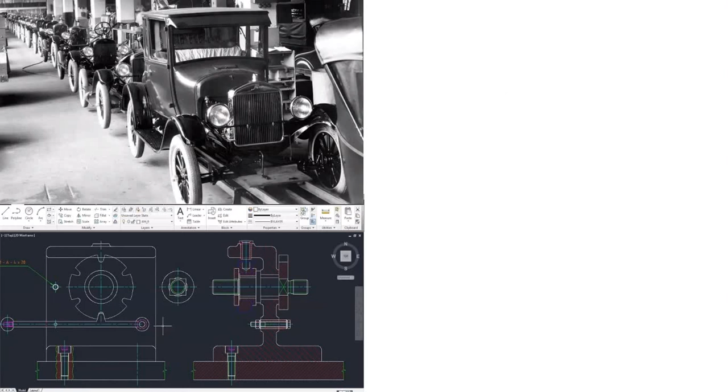So first, again, we'd like to cover a quick introduction to generative technology. So as many of you might be aware of, Autodesk has been making CAD solutions for a little over 35 years at this point. And CAD has always been a way for an engineer to take the ideas that they have and really to put them down on paper. So we've always been constrained on the production processes that we're actually producing our parts with, and we're constrained with the ideas that we can have as humans, really.

So as we look towards the future and we look at the growth of additive manufacturing, Autodesk realized that we need a new set of solutions that allow us to actually explore all of these brand new opportunities that we have. So the idea with generative technology is that it's actually a co-creator within the process. So rather than you creating the part itself, you're creating the loading conditions, you're creating the geometries you need, and you're allowing the generative technology to then explore ranges of options and manufacturing types that you probably wouldn't have thought of yourself.

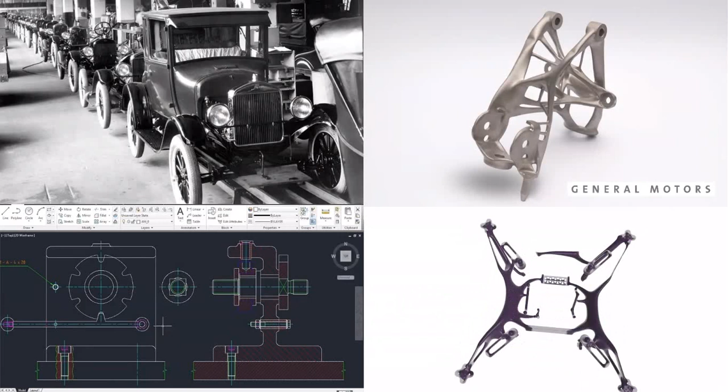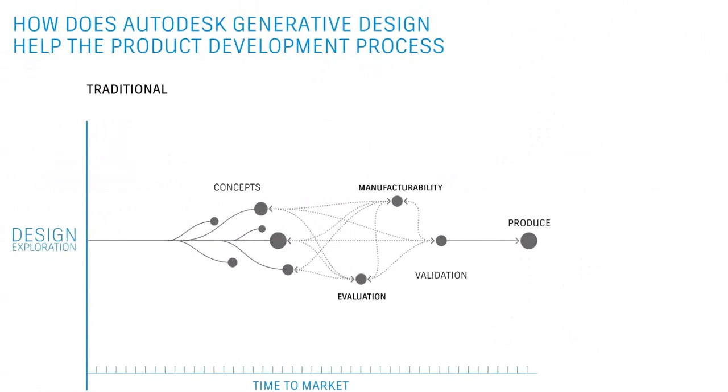So the traditional product cycle that we're really trying to adjust, you're seeing on here. Many of our customers would take a small handful of concepts, it could be 3 or 4, and they start evaluating those for manufacturability, for the integrity of that part. And in the end, they're bringing a product to market that may have taken them longer since they didn't have a lot of concepts. And it might be compromised for some of those manufacturing processes. Maybe they weren't exploring all of the options.

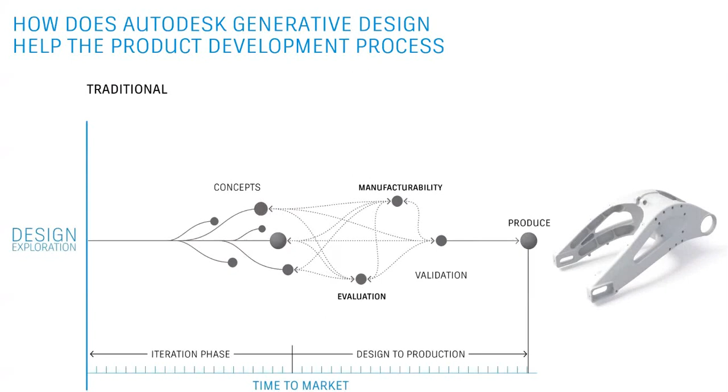So what we'd really like to produce on the generative technology side is, rather than a small handful of concepts, generate hundreds or thousands of options very early on within a product cycle. So teams of engineers can explore options that they would have never thought of in the past, creating outcomes like you see on the right that typically in the past we would have never thought of.

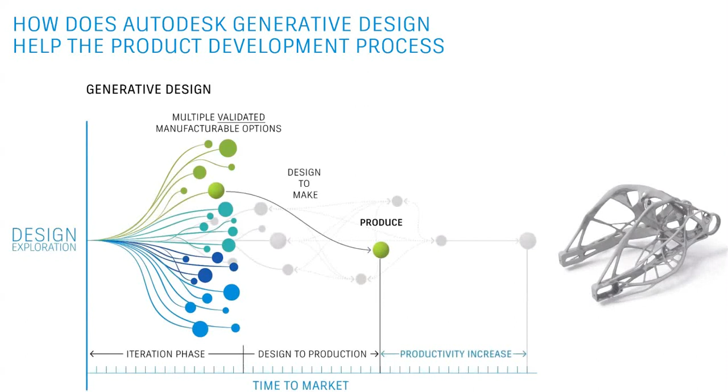So when you look at actually applying generative technology, there's a couple main advantages, and we talked about this a little bit over the last 2 slides. It's really about exploring a wider range of options. So we've always been constrained, typically through the manufacturing process, on what our products need to be. Now we can explore anything from additive manufacturing to 3 and 5 axis subtractive and a range of materials, so we can then start making trade-offs as opposed to continuously making the same type of product.

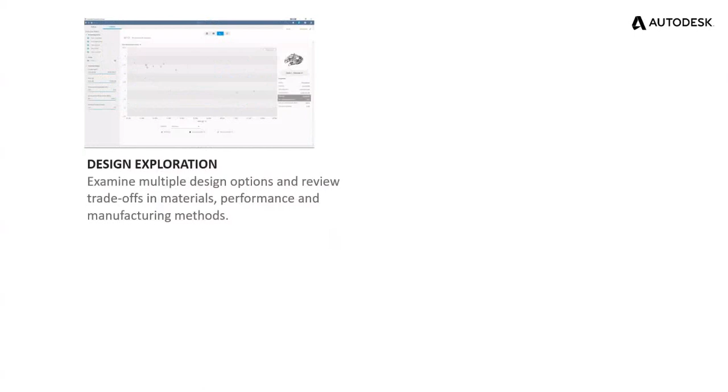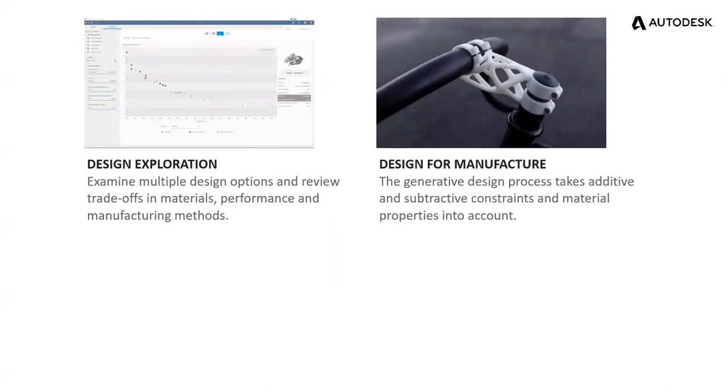Second to that would be planning for the additive manufacturing process. So we talked again about how the means of production are really changing. So generative allows us to truly get the most out of the additive manufacturing process and, again, create a product that we wouldn't have thought of. And third to that would be a parts consolidation example. So generative also allows us to take what was typically multiple components within an assembly and generate an option to consolidate those into one single component.

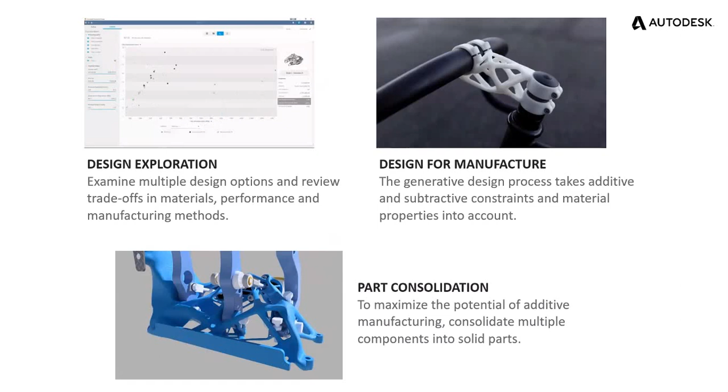So just to show a couple use cases, many people might be familiar with the General Motors generative example, and this kind of highlights everything that we were just talking about on that last slide. So General Motors took that very conventionally produced seat bracket assembly to the top left, and they started generating options of what other kind of ideas they could explore. So in the end, they ended up generating a product that was 40% lighter than the original, 20% stronger. It also consolidated that assembly from 8 components to 1, so saving them on their supply chain.

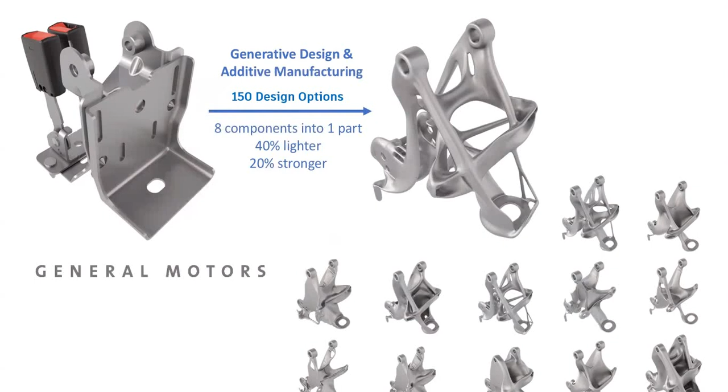But probably more important than all of those things, they were able to generate 150 viable options that they could then start making trade-offs for. So trade-offs for the manufacturing process and trade-offs for the kind of materials that they could produce this with as well.

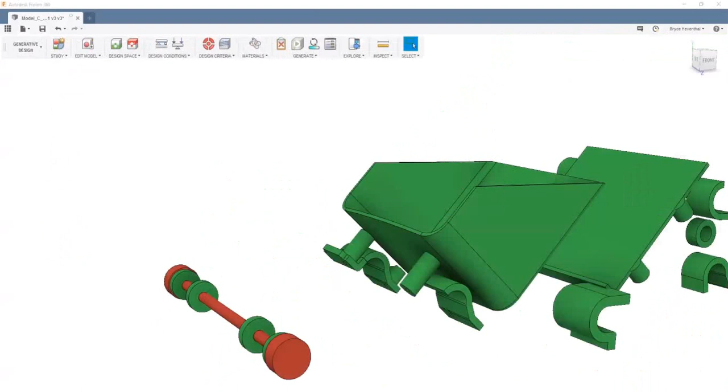So to show the workflow for generative technology, this is a company called Wheel. And what they took is this seat bracket assembly and a very similar process. They first looked at what they needed to connect to and then what they needed to avoid. They set up their loading conditions. So again, this is walking through the entire process from left to right that you can see on the screen. They set their manufacturing processes, so exploring additive manufacturing, subtractive manufacturing. And then they could start solving and exploring options that, again, would be very unique to what they produced in the past.

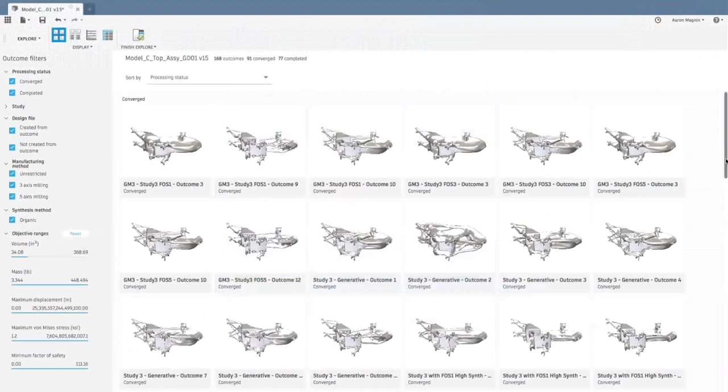So that last image was a preview prior to solving. And then after they've run through and solved everything, they can get hundreds of options pretty quickly. And they can start making trade-offs for, again, the material type and then the manufacturing process as well.

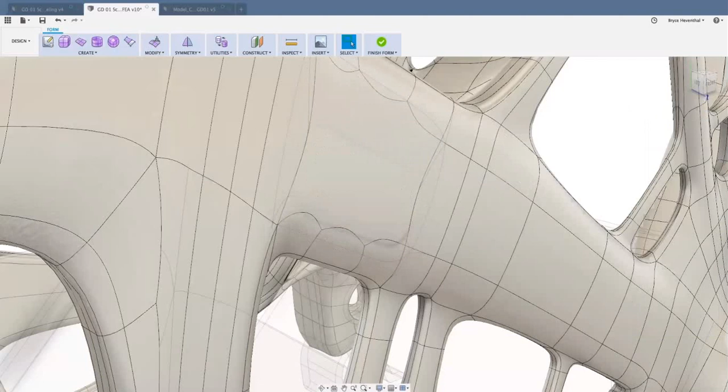So one of the most important things with this process is that after you've generated a component, we are outputting solid usable CAD geometry that you can bring right back into your assembly. You can post-process like you're seeing on the screen. You can run a secondary FEA analysis if you need to, or connect it with additive and subtractive. So really the magic of this entire process is that we're not just creating a mesh that you would have to model over. It's truly creating usable solid CAD geometry.

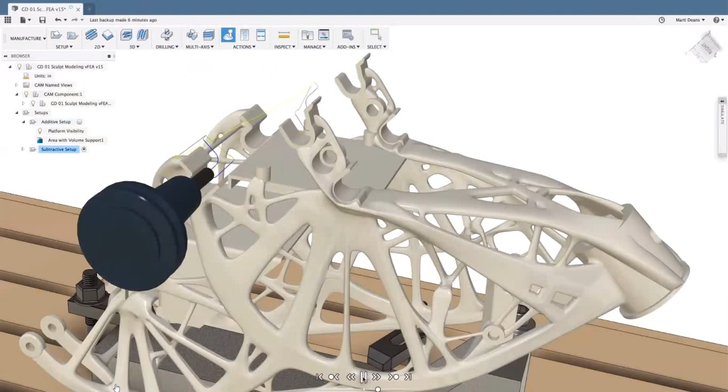So here at the end of the video, you can see some of the CAM toolpaths created and then that final component placed on that assembly.

So there's three main ways to find advantages using the generative technology process. Again, that idea, the first one would be exploring a range of options. So making trade-offs for materials, performance, and manufacturing types. Second would be through the parts consolidation ideas, similar to what we saw with GM. So taking 8 parts and consolidating that down to 1.

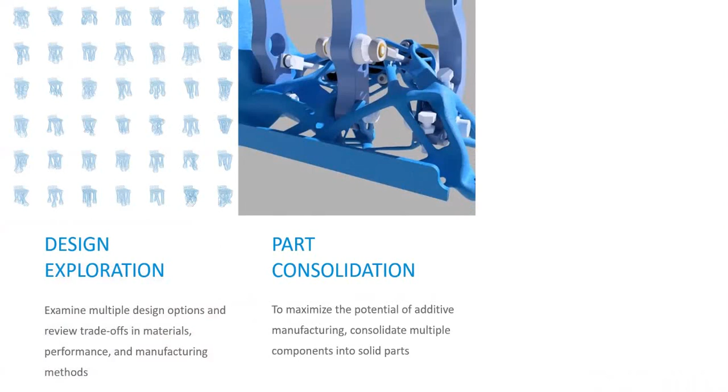And then the third is part enhancement. And this is where we'll actually focus today. So the reason that we chose the use case that we'll be presenting later on is that we think it's pretty unique and it's something that not a lot of people have explored yet. So this is an example where we have an existing component and we're going to use generative technology to improve strength and then reduce the mass of that component as well.

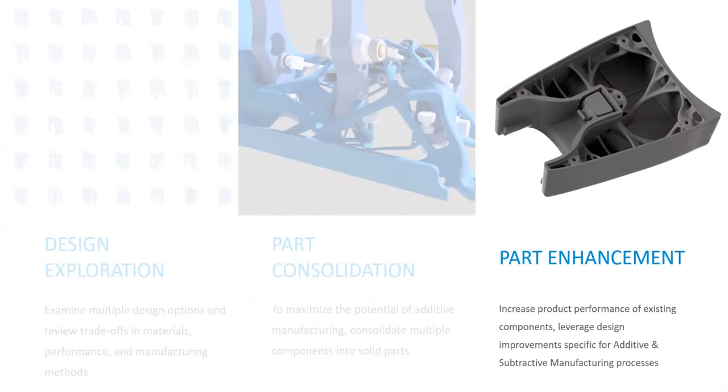So just to conclude a little bit about the introduction to generative technology. So what is unique about it? Again, the idea that we're exploring a range of options. So within one solve, we could get tens, hundreds, or thousands of options. We're exploring a range of materials and manufacturing types. And then what we get on the back end is CAD-ready geometry that we can continue to work with.

So with that, I'd like to kick it over to the team from Penumbra, and we can start covering the use case we'll be talking about today. Oh, thanks so much, Matt. This is Dean Pierce again with Penumbra Engineering. I'm going to give you a little background as to who we are and kind of where we've come from.

As both of us mentioned in the beginning, we come from the aerospace industry mostly, but in there we've got backgrounds in both design and test. One of the things that we're very proud of is being part of the Arizona Tech Council here and the Additive Manufacturing Committee here in Arizona. My co-owner Steven is a co-chair for that, and we've been trying to become as active as possible with regard to generative design amongst the community, and it's being received, and people are starting to dig deeper into it, including some of the larger corporations as well, which is very good. Everything is moving forward with that.

We have a licensed professional engineer, that's me, and we've spoken at a number of different events, like the Additive Manufacturing Tech Council meetings down in Southern Arizona, the Business Expo, 10 West. All those things have been predominantly here in Southern Arizona, specifically in Tucson. And I was going to mention too that we actually did basically this topic at Autodesk University back in November.

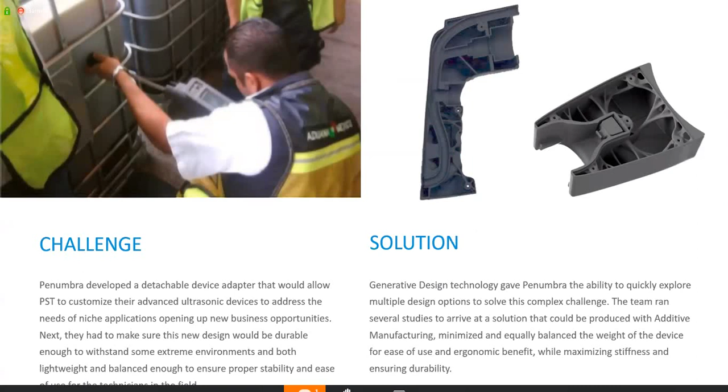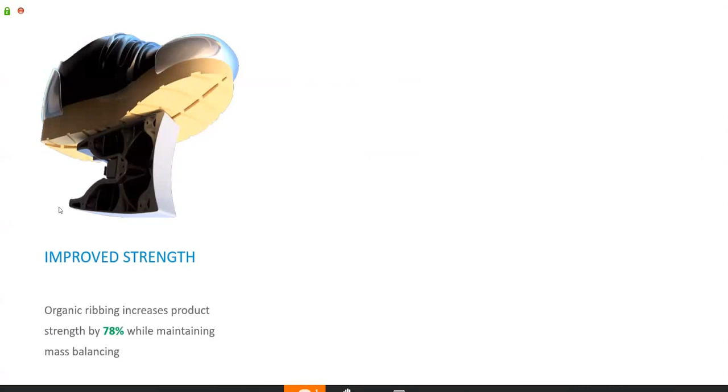And so one of the big things that generative design allows you to do along with additive manufacturing is really tackle that improved strength. One of the baselines that we were able to do is start out with a traditional type plastic design where we had traditional ribbing, and then we were able to go over to generative design and create a bunch of new options. And then we were able to arrive at a result that was a 78% increase in strength while also maintaining mass balancing.

This product is a handheld, so a big portion of it is being able to have it so that it doesn't fatigue someone's wrist. So we're actually working with mass balancing. The good part about generative design is that you can actually put mass targets, or you can go for the lowest weight, the best strength to weight ratio possible. So we did a compromise there with the mass balancing to make a really, really good product that the technician out in the field could hold and not be fatigued.

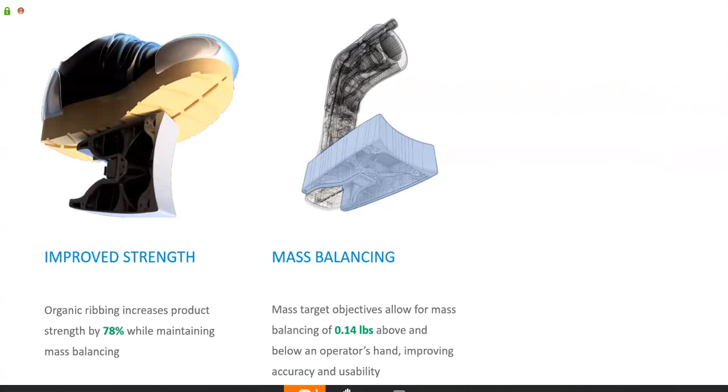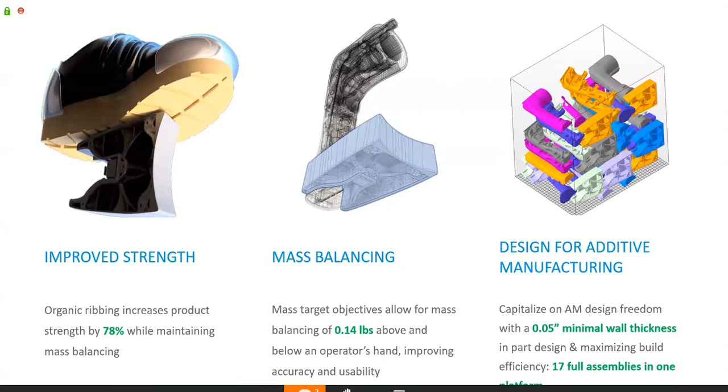And then lastly, the design for additive manufacturing portion. Generative design can be applied to a lot of different areas, but with additive manufacturing, we have that design freedom to really create this unique product from the ground up. And we're using parameters through, and Matt will talk about this a little bit, the other product that Autodesk has, Netfabb. We're able to go in and optimize it for builds to get the best cost per unit. Go to the next slide.

And yeah, taking a few steps back. So that's the use case, and we were able to deliver that product for them. But really the inspiration, where we first heard about generative design and this thinking and being able to apply this to projects from the ground up, started back in 2013. This is a book that I like to refer people to. It's called Fabricated.

And really this book really showed that the multi-jet fusion technology, which we'll talk about a little bit more as we go through, is a powder-based technology, but it's really based off of voxels. And so that concept where you can actually apply different material properties along a composition of a part. And so HP, MJF, and HP in general, their path is following this line of where we're going to be able to use generative design, create shapes that are optimized, complex shapes, but in the future, we'll also be able to take that a step further.

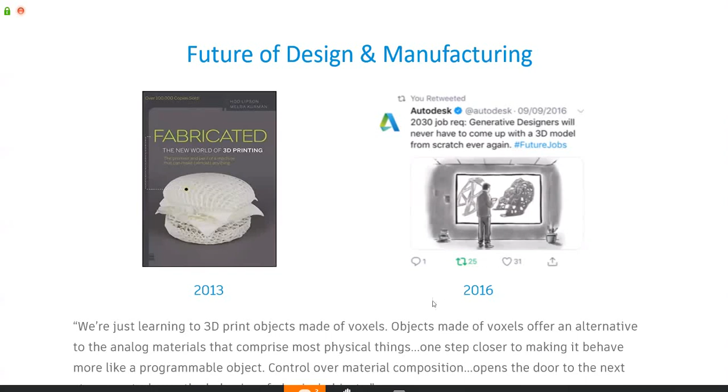And then, as you see there too, in 2016, generative design was taken out of Project Dreamcatcher, and you may have heard that if you follow Autodesk. And basically, generative design is the formation of that into an actual product that Autodesk is now using. And so the combination of this voxel type additive manufacturing technology plus generative design really combined together gives you this huge advantage when creating these new innovative products.

And then the next advantage is this optimized design is easy to use too. Like I mentioned, the mass balancing. So it's balance designed to reduce the fatigue on the user. And the good part is too, that this product was not intended to be produced in high volume. It was a low volume product. So you're talking 1,000 units or less per year. And with multi-jet fusion technology, the cost per part makes this a viable option.

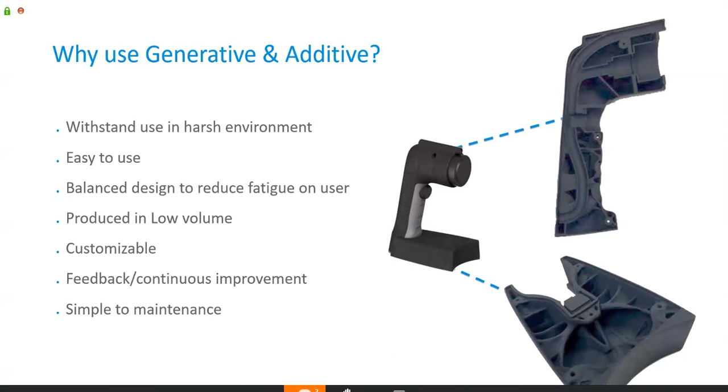And then another big benefit too is we try to make this really simple to maintain. So combining a lot of parts together where we could, try not to use a lot of hardware, so that if we needed to maintain this, take it apart, replace some of the electronics inside, we could. So I'll pass it back to Matt now.

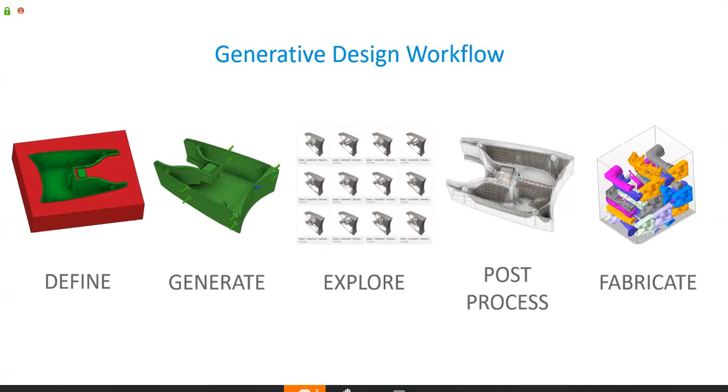Next, we need to post-process. So we talked about this a little bit at the beginning, is that the outcome that you get from generative design is usable CAD. So we need to take that usable CAD geometry right back into something like Fusion, and there we can post-process or make any final adjustments. And then finally, we need to fabricate. So in this case, we connected it with our additive manufacturing platform to then produce the components that you'll see moving forward.

So to get started on this workflow, looking a little bit closer. So again, we talked about the first step that you always need to do on these projects is to take all of your geometry into account. You need to think about your functional and your manufacturing requirements. And you actually need to edit or create geometry to call out those obstacle geometries that we talked about.

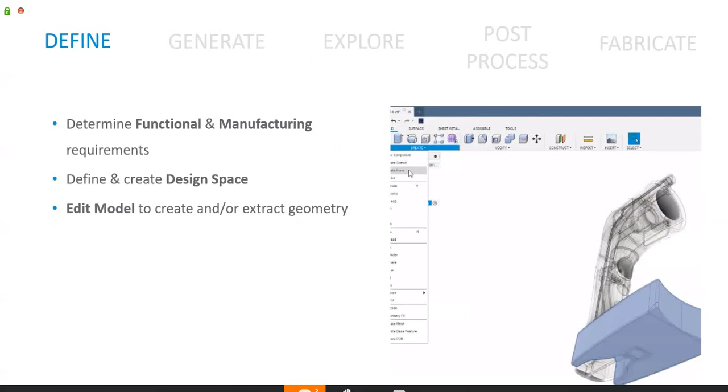So to do that, we took the existing component, and what we needed to do was start to extract some of that geometry where we wanted generative to come into play. So here we took that conventionally produced part that had those pinned sections that you can see from that lower face, and we've essentially cut those away because we want a brand new way for generative to create all of those connecting features.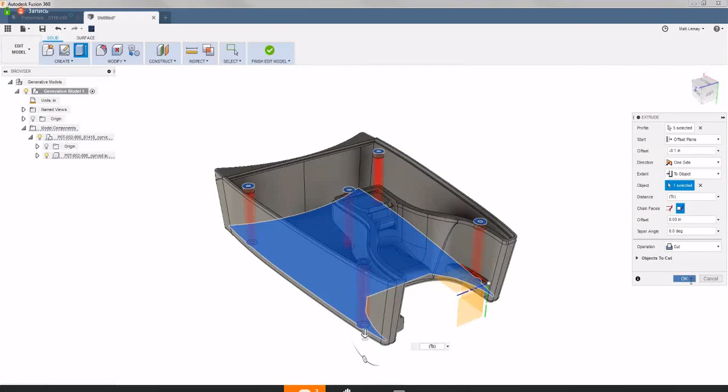We then needed to create material on the outside of this component, which we would call out as an obstacle geometry later, saying that we want the exterior of our component to look exactly the same as it currently would with a traditional process.

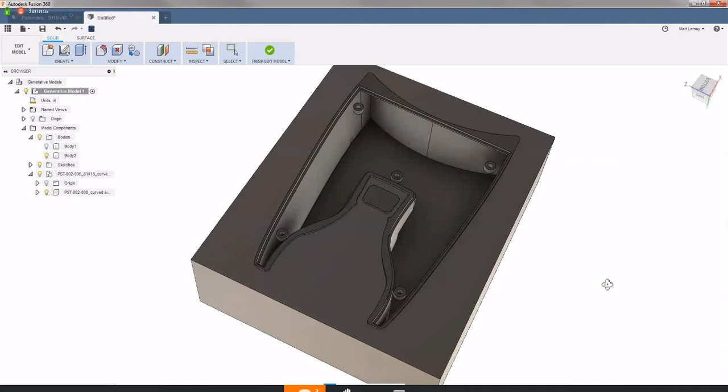And then moving forward, sorry about that, lost the slide. We need to then set up the generative solve itself. So again, we need to go through, call out what our preserves are. Our preserves, again, are the geometry that we know that we need to keep in. We need to call out our obstacle geometries, which again is the geometry locations that we need to avoid.

We need to set our performance objectives, whether it's minimizing mass or setting a specific mass target, like we talked about for this project. We need to select our manufacturing types. So we've been talking a lot about additive manufacturing within this presentation. However, it's also very important to know that we can also set up subtractive manufacturing constraints as well. So we could put in 3 and 5 axis requirements. And then we need to set our material, the materials that we'd like to solve with as well.

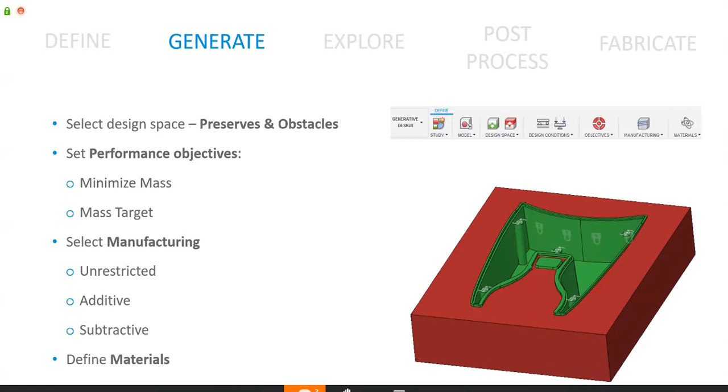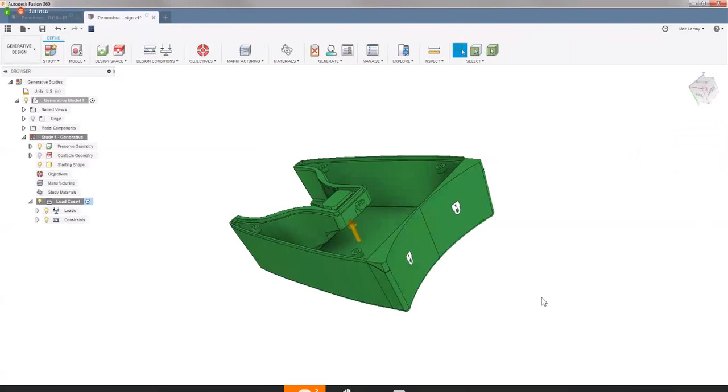So just to show this quick flow that we were just talking about, all of that geometry that we've created, we're now calling out as the obstacle geometry, and that turned to red, meaning after the generative process is completed, there's not going to be any geometry that goes in those sections. We're then calling out what our preserved geometries are, and you can see that in green. So that's all of the geometry that we know that we need at the end of this solve.

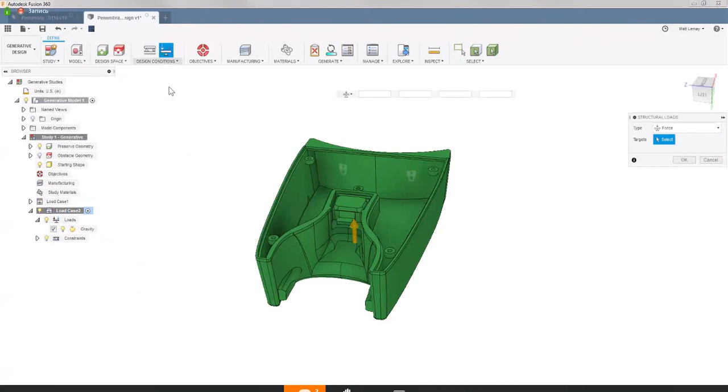And then we start applying our loads and constraints. So we know when the adapter is attached to the handle, it's constrained on those faces that you see in the lock in the back, and then there's a pressure force applied to those front faces. So we would continue applying load cases, and then in the end, we had about, I think, 7 or 8 separate load cases that could correctly identify all of the structural needs that this part would have. So I'll fast forward this just a little bit. So we've applied, now you can see to the tree on the left, all 6 of our load cases.

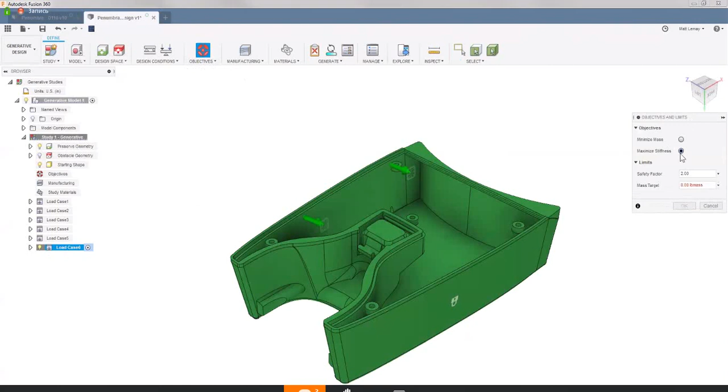And moving forward, if you see the user interface at the top, everything is moving left to right. So after we've applied those load cases, the next thing that we would do is set our objectives for the solve. So here we talked about the ability to set a mass target, which is really interesting in this case. So we can say, generate me components that have a specific mass. In this case, we did 0.14 pounds. So that's allowing us the ability to then even out the mass on the top of the adapter and on the bottom, making it a really easy to use part for the technician.

Next would be setting our manufacturing constraints. So here we know with the HP Multi Jet Fusion process, there's a minimum thickness requirement that needs to be met. And then you can see underneath, there's also milling constraints that we might apply just to see what kind of results we can get through that. So again, within one solve, we can set all of these manufacturing criteria, and we can also set a range of materials to explore as well.

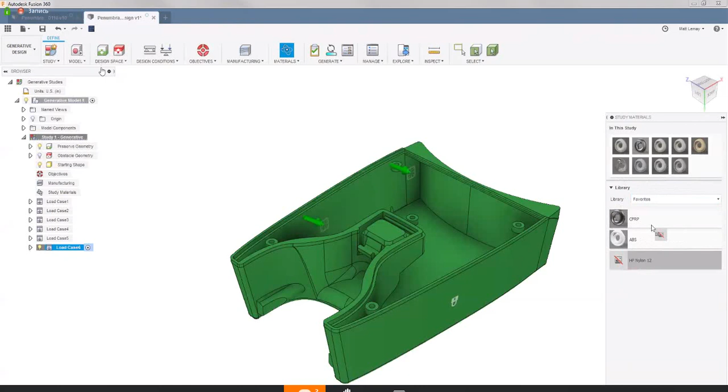So in the end, we ended up going with HP nylon 12, but we can explore a lot more than that as well. We can say, show me the results if it was in a carbon fiber reinforced plastic, nylon 6, HP nylon 12. We can put in all of these different material options so we can explore what the performance improvements for each one might be at the end. So again, in the same way that we selected a range of manufacturing types, we can also select a range of materials to then explore. And when we're finished with that, so we selected up to 10, at that point, we would be ready to start solving.

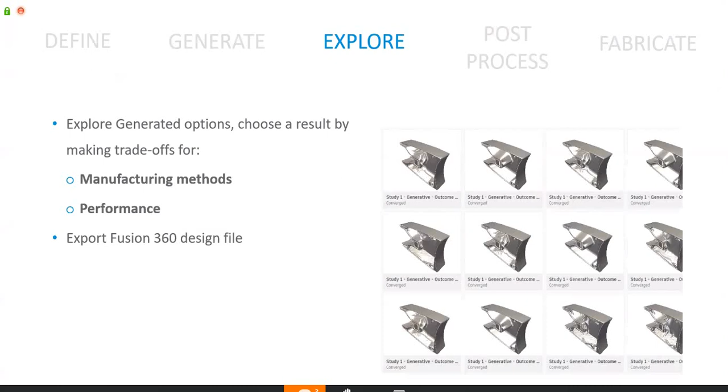So the next phase, after we've set up our project, we've applied our loading conditions, set our objectives and our manufacturing types and materials, the next phase would be to explore the results we've actually created. So here we can start making those trade-offs we've been talking about, and then we'll send out that solid CAD file to work with. So through this project, there's a wide range of options. Again, we had a range of materials, a range of manufacturing types. So each one of those materials and manufacturing types yields its own unique solution. So carbon fiber reinforced plastic is going to react very uniquely to how HP nylon 12 and additive manufacturing might.

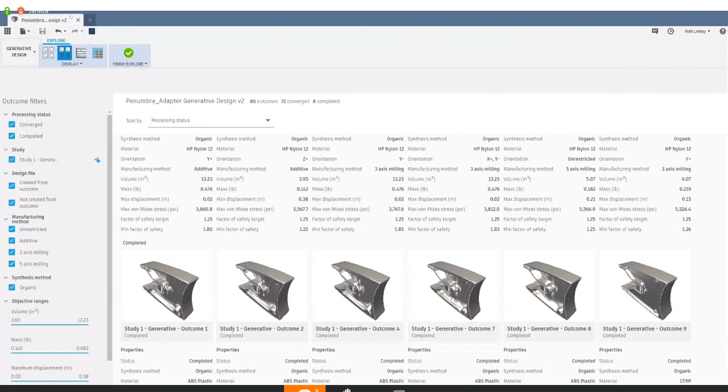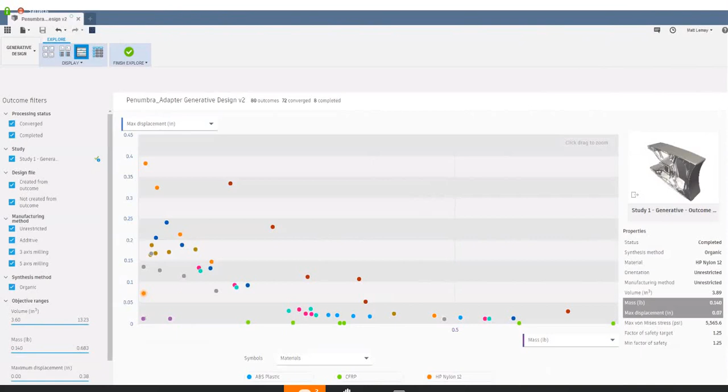So here we can take all of those results. We can view them in the thumbnails and the properties that you see. We can also view them graphically as well. So this is really interesting where we can say, show me all of these parts on a specific mass range. We can start filtering them down to specific strengths and stress references that we would like to then find the part that we'd like to move forward with.

So the part that we found is the one that you can see on the screen there. So this was, again, that HP nylon 12. This was meant to be an additive solution, so it kept that minimum thickness that we required for this project. And it also met the mass target of the 0.14 pounds that we wanted to find for the adapter.

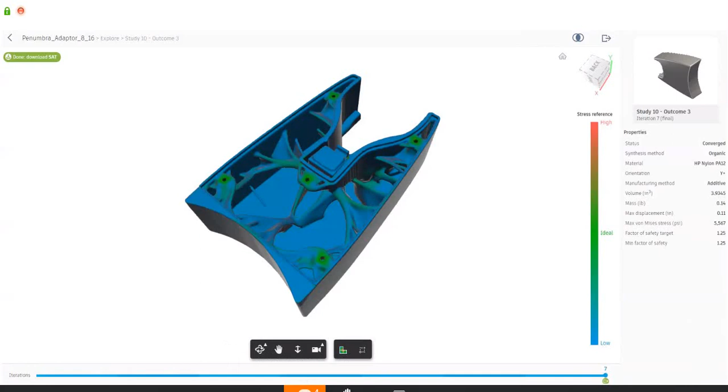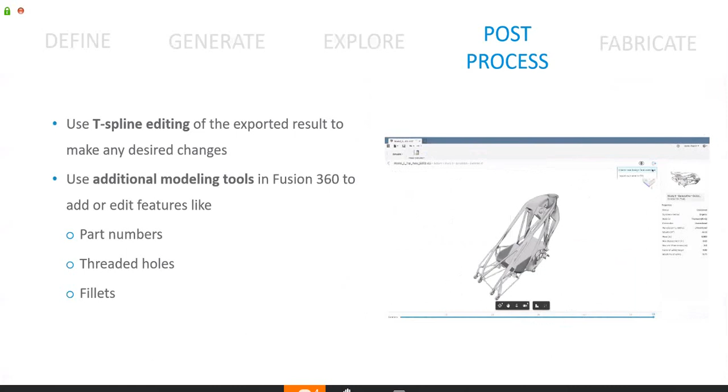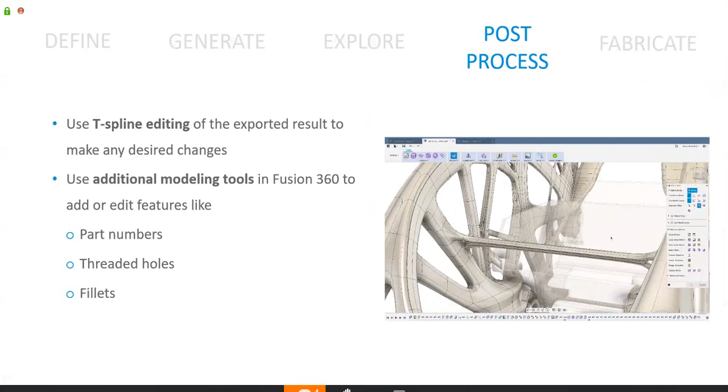So moving forward, and we won't show too much on this project with it, but after we've sent out that solid CAD file to then move forward with, we have the ability to post-process that. So this could be adjusting the actual surface geometry itself. It could be adding a part number to it, or whatever we need to do to get it fully ready for the production process. Again, the real value here is that the generated part that we've created is usable CAD that we can send back.

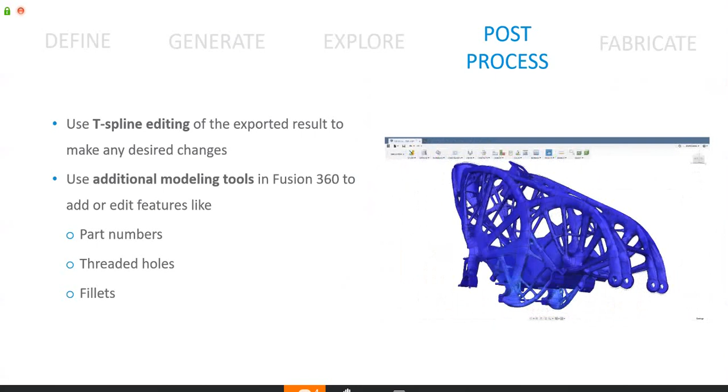And then finally, the last phase, which is fabricate. So after we've generated a component, we've sent it back, we've post-processed, we're ready to connect this with the additive manufacturing process, and we'll show that with Netfabb, which is Autodesk's additive manufacturing platform.

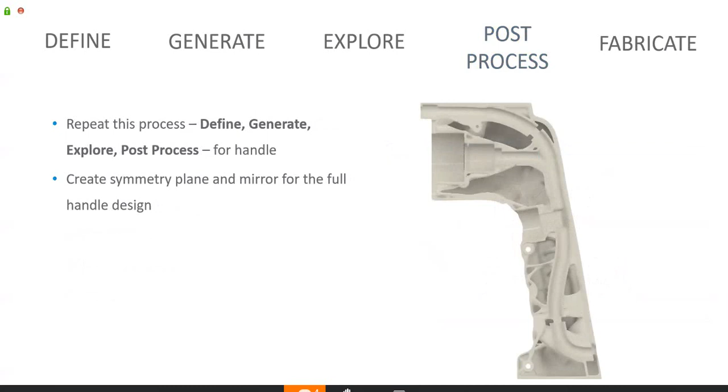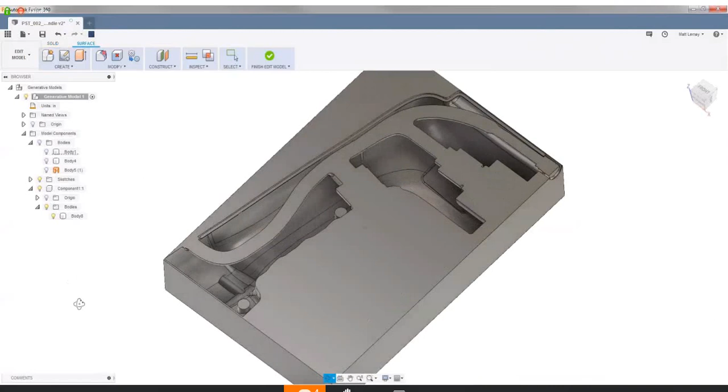Oh, I guess we do actually have the handle as well. So we showed the adapter, but it's going to be a very similar process for the rest of that component, where we're setting up our geometry space, creating geometry to call out as obstacles where we know we can't generate any, applying our loading conditions, setting our manufacturing and material types, and then solving as well. So the same way that we did that process here for the handle component as well.

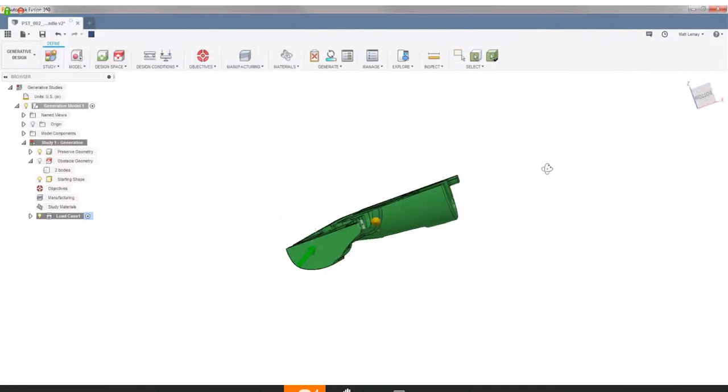So I'll fast forward a little bit in this video. You can see we have the generative user interface again. The green is the preserved geometry for the outside of the handle. And again, we're applying our loads and constraints to this part.

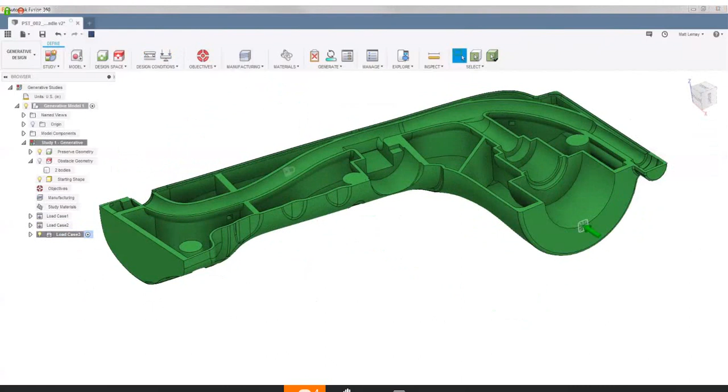So with the adapter, we had about 7 or 8 load cases, and we would do the same for the handle. So after we apply all the load cases, again, we talked about the ability to set a specific mass target for the adapter, which would be lower than the operator's hand, to even that out to the top. So in this case, we can put a mass target that's going to allow us to say that on top of the hand is going to weigh the same as on the bottom of the hand as well.

Same thing with the manufacturing types, like we did with the adapter. We can put in our additive manufacturing requirements, and we can also explore those subtractive options as well. And then exactly the same, we always want to explore as many material options as possible. So we could select up to 10 the same way that we did with the adapter.

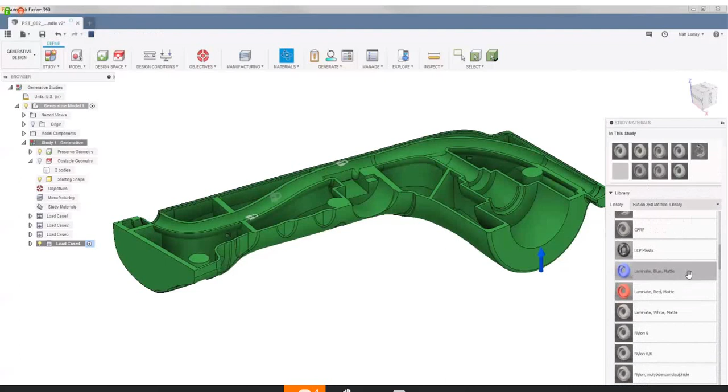And then finally, after we've set up that project, we can then solve it and then start to explore all those options. You can see I've ran this one a couple different times. So there's a wide range of results that we received from that, over 140 outcomes. And it's important to note as well that within each one of the outcomes, there's also a range of iterations that we can choose from.

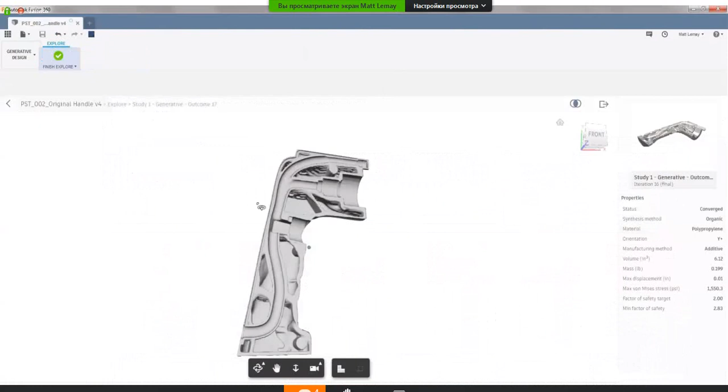So if you see that slider at the bottom of that one outcome, and I'll pause it right here. You can see that this one ran 30 iterations. All of the iterations leading up to this final converged solution are also viable, usable options that we could move forward with as well.

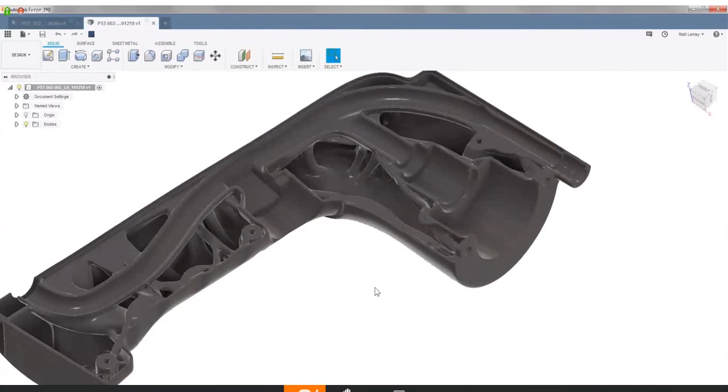So after we've found the iteration and the outcome that we'd like to move forward with, again, we can send that out as usable CAD geometry that we could then continue to adjust or run through FEA, or we can continue to produce. So after we've set up the adapter, generated our outcome, and we've generated our handle outcome as well, the next phase would be to fabricate. And this is through Autodesk Additive Manufacturing Platform.

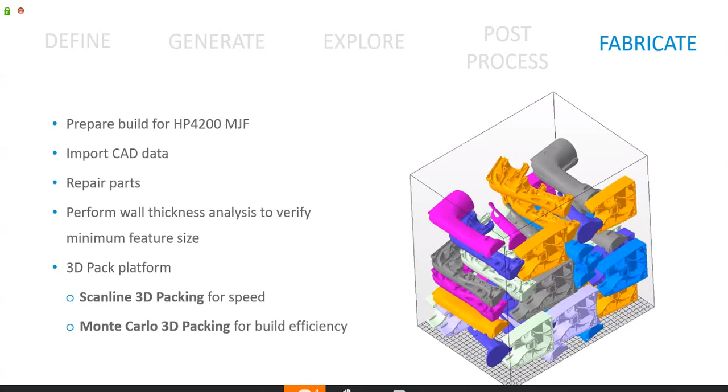So what we need to factor in here is we're looking at the HP Multi Jet Fusion process, which one of the great things about that process is that it allows for 3D packing. So if you're not familiar with that, you can fill almost the entire volume of an HP printer with components, allowing you to drastically improve the efficiency of your process. We can look, and then just verifying that minimum wall thickness was met.

So again, the first thing that we would do is we would bring those components inside the HP Multi Jet Fusion workspace. Within that workspace, we can take a look at each one of the components. And one of the first things you typically always do is you might repair a part. So in this case, there weren't any issues with the part. It came in as a watertight solid, as you would expect from sending it out through the process that we just showed.

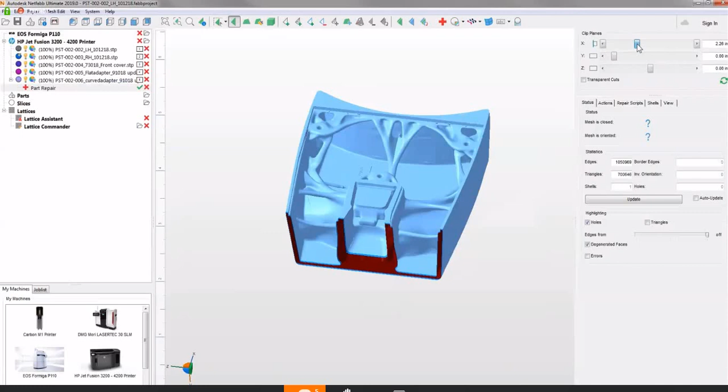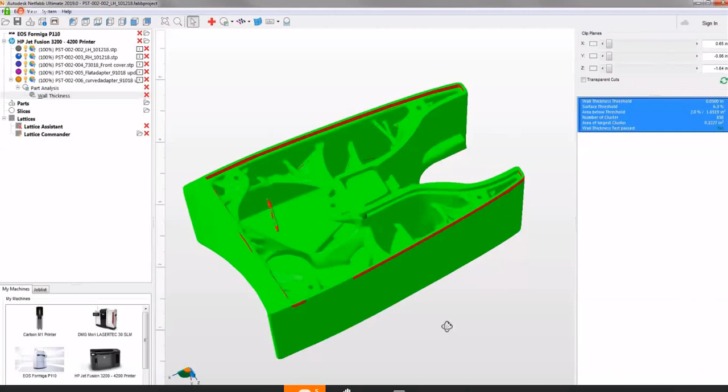We can also run a minimum wall thickness test to make sure that all of the features within this component would fit the minimum wall thickness that the HP process allows for. And you can see that this is above the threshold in saying that this passed. Again, we set that minimum wall thickness when we were setting up our project as well.

So the next phase, and again, this goes back to the idea that we can fill an entire printer's platform. We really want to try to get the most out of this process. So there's a couple different ways to do it. We can 3D pack an entire platform with these components. So again, we can print as many as possible within one print job.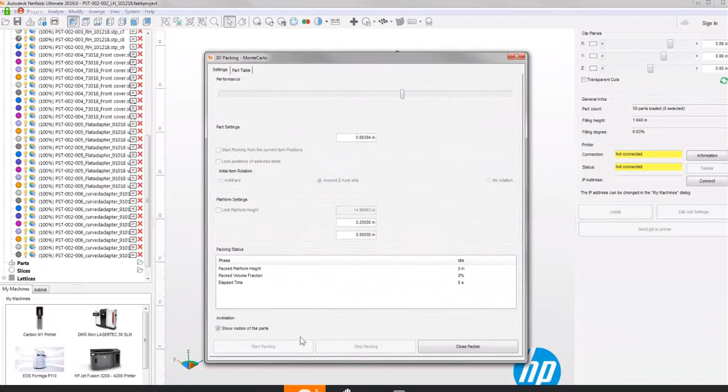So here we can do what's called a Monte Carlo 3D packing, which takes all of those components that we brought in, and those could each be their own unique order, and then it packs the platform of that printer to fit as many of those parts as possible within one setup.

So now that we've set up the adapter, we set up the handle, we generated outcomes and then produced those, I will hand it back to the team from Penumbra to talk a little bit about the outcomes. Yeah, so we're going to kind of go back through some of the same things we talked about just to kind of recap, and then we'll go into some of the economics a little bit too of

this part. So really the additive advantage for this product was that we can make it better than traditional means, 78% improved strength compared with the conventional design. And a big one too is isotropic part properties. So a unique thing about MJF versus like an SLS technology is that it is nearly isotropic, so that we can actually do simulation accurately and be able to basically take the loadings in X, Y, and Z and have

good results from that, unlike an FDM type technology where we're dealing with the layering and the strength between the layers, so that is inherently anisotropic and very hard to do simulation on. And even processes like SLS vary a little bit in other directions.

And then the customization possibilities was probably one of the big pluses for our customer, just to be able to take that bottom adapter and make it flat, curved, or a unique shape, because the function of the product depends upon the coupling of that transducer up against the surface of what it's reading. So that was a big plus.

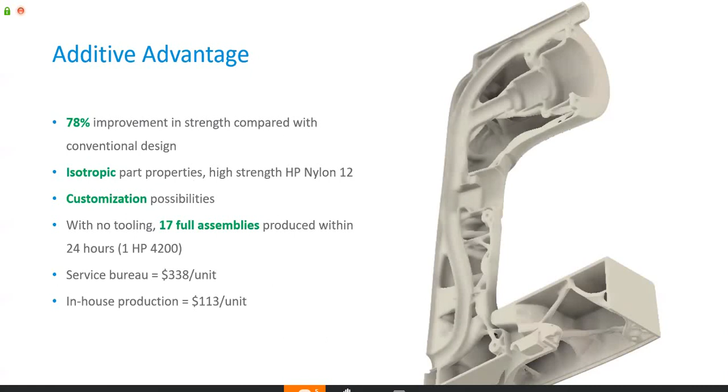This is Dean. You know, I really love that other slide where they talk about the benefits from a pure engineering perspective. And one thing that we've been trying to do is actively making use cases and business cases for all of this stuff. I myself, as an engineer, desperately love things that you can analyze. The nylon 12 that we've used has made all of our predictions very accurate for the load cases that we've been able to push through on this particular unit.

What I really like about it is that you can actually optimize everything from two perspectives. You can use engineering in general as a methodology to provide an upfront user cost, and create something as efficient as possible. And then on the back end, you can also save costs using the additive stacking method or nesting method. And I'll go ahead and hand it off to Steve.

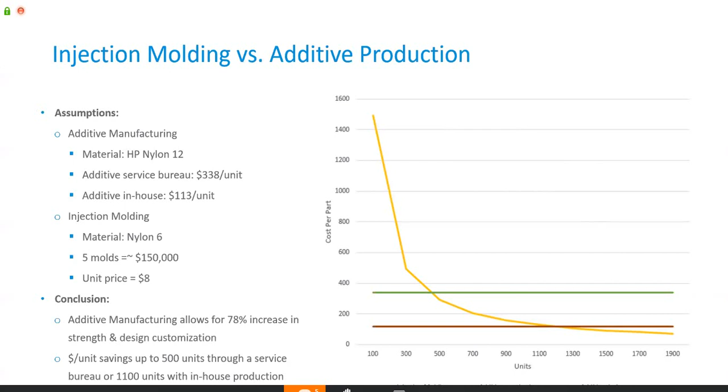So yeah, next steps. So Matt kind of talked about, on the Autodesk side, where to get plugged in with Fusion 360 and Generative. Penumbra Engineering, we are a product development services company, and one of the things that we like to push is that empowerment of additive manufacturing.

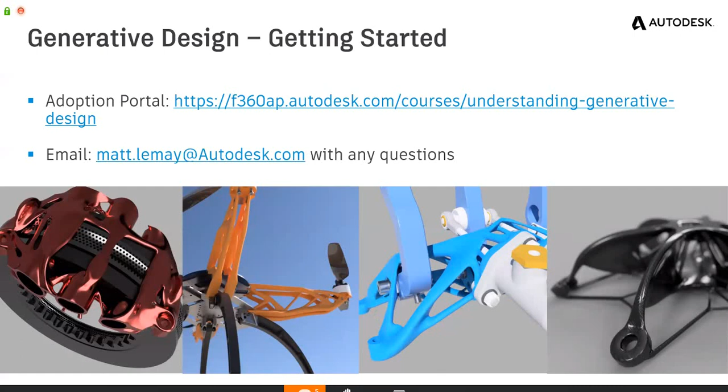So there's a question from Thomas in the Q&A, and the question is, do you have any plans to incorporate optimization for thermal flows? So I think improving the generative solve to include multiphysics is something that the team is certainly working on. And Thomas, if you reach out to me separately, we can probably talk more about that.

Another question in the Q&A, this one from Alex: is injection molding a manufacturing method generative can optimize for? So injection molding is not specifically a process that we can generate for yet. I think same as multiphysics, it's one of those things that is certainly on the future horizon for the product. But right now, as far as manufacturing, we can only do additive and subtractive for 3 and 5 axis.

And then I should also note, while we don't technically have injection molding or casting, the fact that we do get usable CAD geometry sent out through this allows many of our users right now to take out an outcome and then alter it for that specific process.